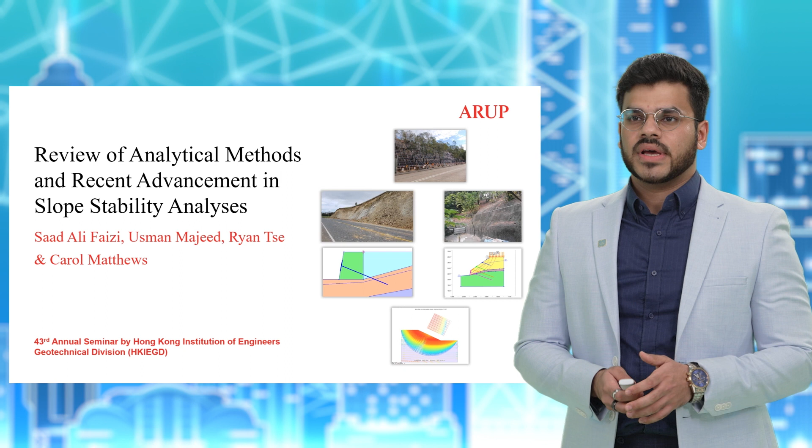I'm here today to present insights from our paper titled Review of Analytical Methods and Recent Advancement in Slope Stability Analyses. In this paper, we discuss some current analytical methods and propose a new approach to refine existing methods. We also share our recent advancements in automating slope design workflows. This paper is co-authored by Usman Majeed and Ryan Tse from Arup Hong Kong and Carol Matthews from Arup Newcastle, UK.

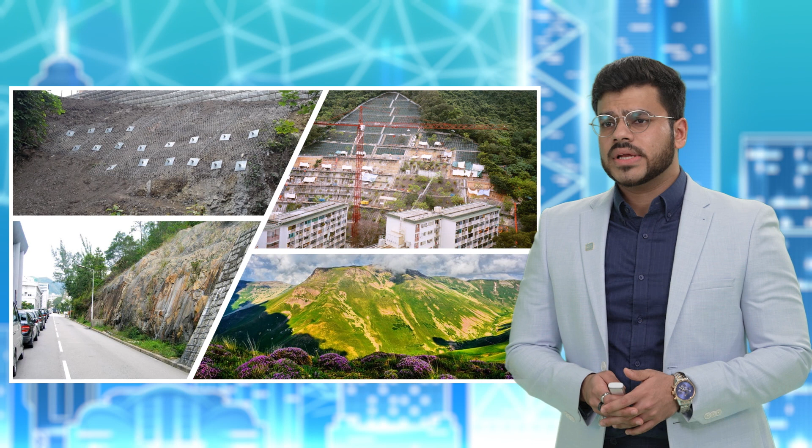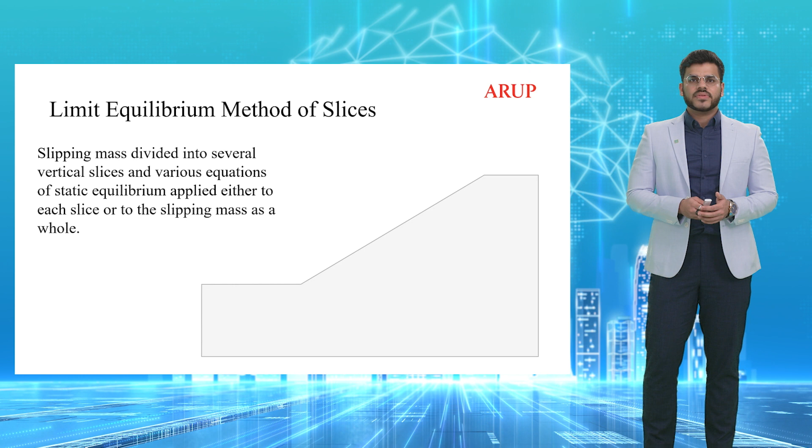Slope stability analysis is a critical aspect of geotechnical engineering and is important in various applications, including the design of retaining walls, excavations, and embankments, upgrading of natural slopes, among others. Current geotechnical practice widely adopts the method of slices, such as Bishop, Janbu, Spencer, and Morgenstern-Price, to analyze slope stability using limit equilibrium. These methods divide the slipping mass of the slope into several vertical slices, onto which equations of static equilibrium are subsequently applied.

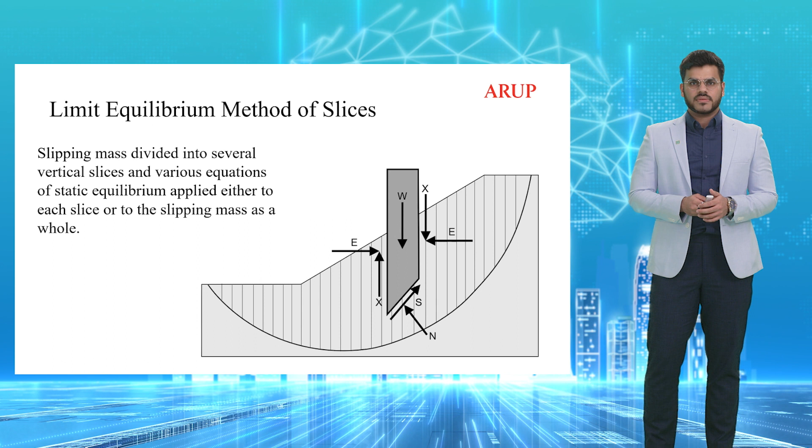The different methods differ fundamentally based on the conditions of equilibrium they satisfy and their assumptions regarding the interslice forces involved. Several studies and publications have investigated the merits and deficiencies of the different limit equilibrium methods. And while they all point out some fundamental limitations of the different methods, especially the simpler methods of Bishop and Janbu, these studies have also noted that the errors in the calculated factors of safety from these simpler methods are usually small and on the safe side.

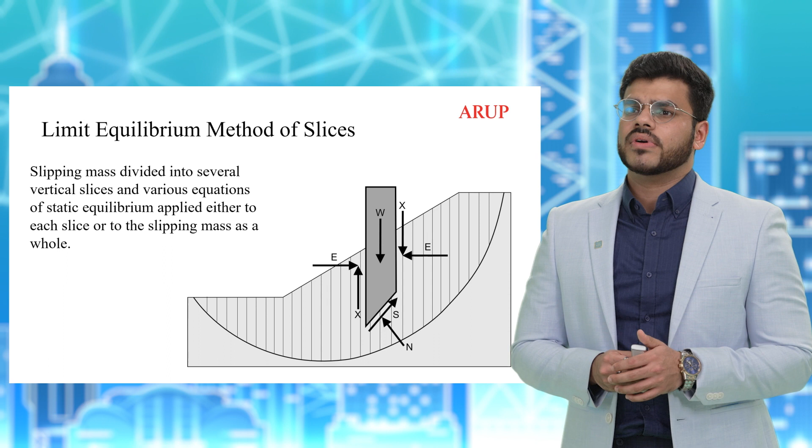However, there are situations in which these relatively simple analytical methods may encounter issues. Authors from past studies investigated the formulation of the Bishop method and its implication in various slope scenarios. They noted that the Bishop method may incur numerical difficulties and provide misleading answers in special instances involving interlock. Other methods like Janbu and even Spencer methods may incur similar difficulties in dealing with this interlock phenomenon. So what is this interlock phenomenon?

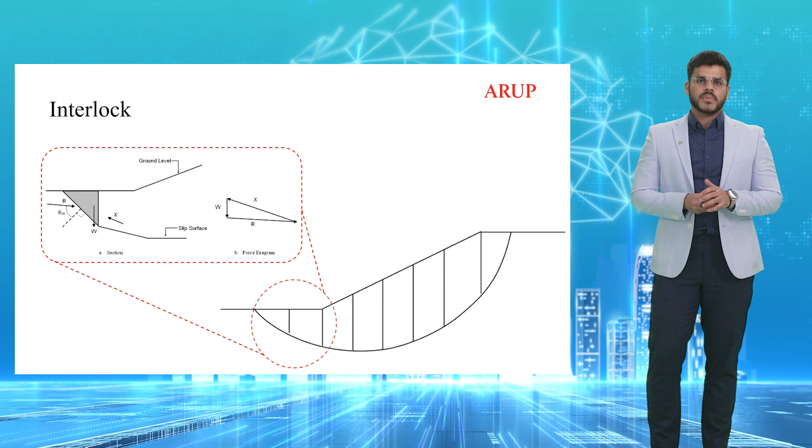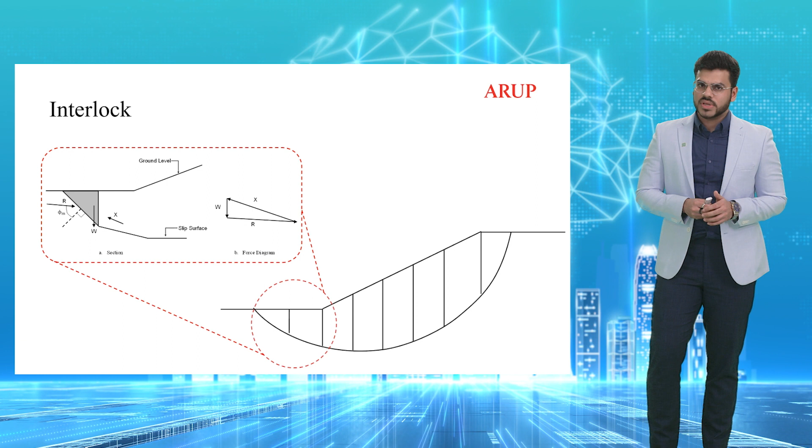Well, interlock arises in the case of a deep slip with a low factor of safety, where the toe of the slip surface passes steeply through a highly cohesive or a highly dense granular material. If a deep slip emerges at a steep angle and has a high cohesion or high mobilized angle of friction, then the direction of the resultant on the base of the slice may be almost horizontal or even pointing downwards, as shown here. To satisfy equilibrium of this slice, the interslice force must point upwards.

This direction is not consistent, however, with the assumption of either horizontal or even parallel inclined interslice forces. In such cases, the inclination of the interslice forces should be allowed to vary to act in the correct direction and take interlock into account.

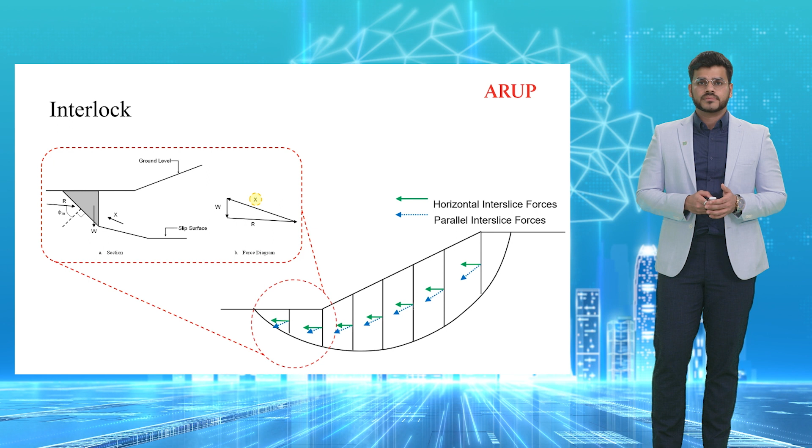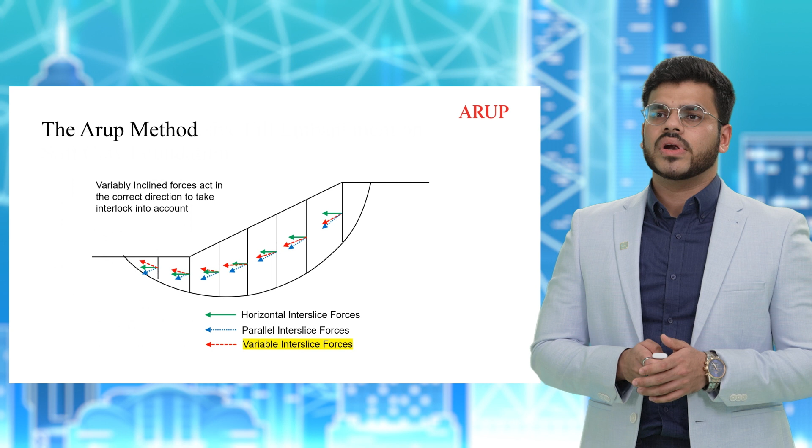Arup has developed a method whereby Bishop and Janbu methods are refined further by enabling the inclination of the interslice forces to vary. Under this approach, the program calculates the interslice forces to maintain horizontal and vertical equilibrium of each slice first. The inclination of the interslice forces is then varied in each iteration until overall horizontal, vertical, and moment equilibrium is also achieved. Two case examples from past studies are taken to investigate the interlock effect and the use of variably inclined interslice forces.

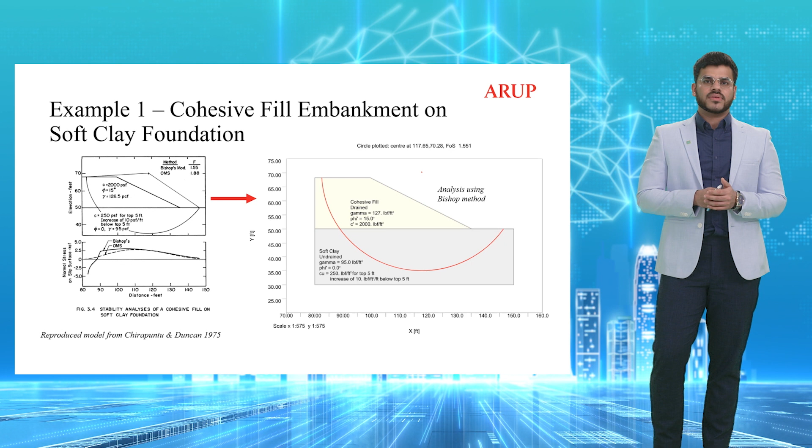In this first example from a past study, the authors exemplified the difficulty of employing the Bishop method by investigating the results of slope stability analysis for an embankment made of a highly cohesive soil. While a good agreement was noted between the ordinary and the Spencer method, the results from the Bishop method were noted to be unreasonably low. This was possibly due to the high cohesion involved.

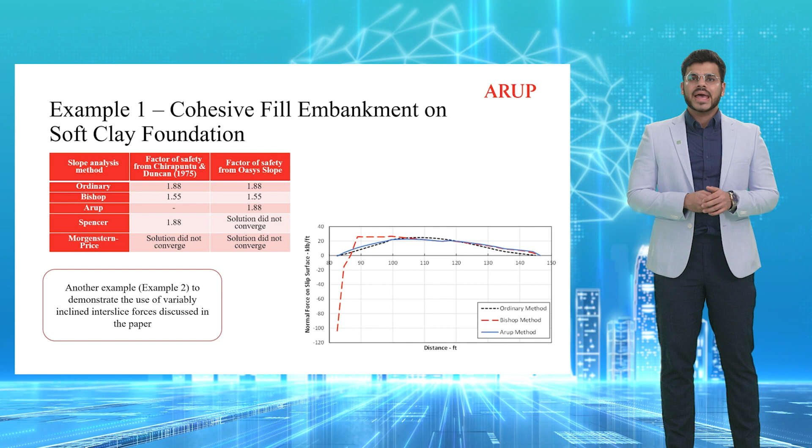This case example was replicated and rerun along with an additional analysis using the Arup method. Results obtained from the Arup method were noted to be reasonable and consistent with the ordinary and Spencer methods from the original study. A similar investigation is also performed on another case example presented in the paper in detail.

Hence, we can see how the Arup method offers refinement on existing methods and enables more reliable slope analysis. Similar benefits to slope designs can also be achieved if existing design procedures are streamlined. Fortunately, Oasys Slope does offer designers the opportunity to automate design workflows using customized coding.

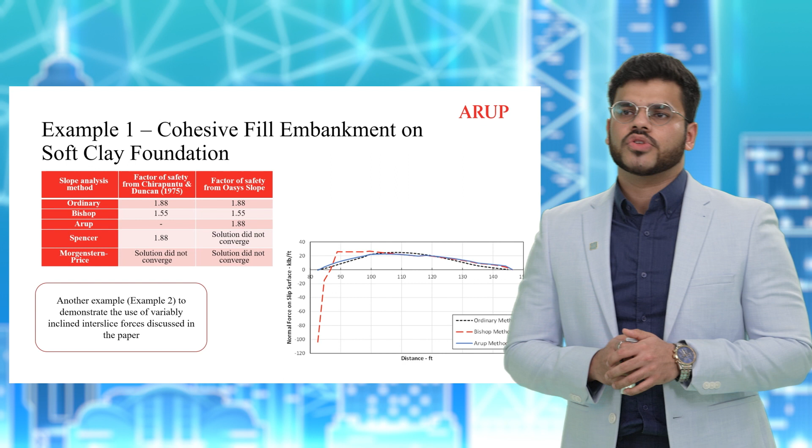Given that the design workflow of soil nail involves several design parameters and detailed calculation of bond strength based on specific slip surface, it requires several manual calculations, and any updates made to any of these key parameters or even a change in the critical slip position would require manual updating of these several calculations performed. Automating this crucial part of the design workflow can greatly assist an engineer and minimize chances of errors due to manual handling.

Oasys Slope facilitates automation of soil nail design through two distinct ways. Firstly, it provides the option to calculate the bond resistance of the applied reinforcement members based on the effective overburden stress of the slip surface.

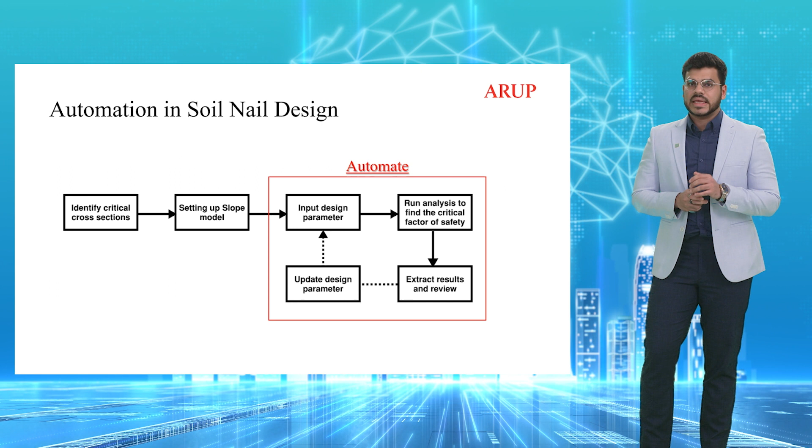Secondly, it includes an application programming interface, or API, that allows the user to interact with the analysis software using different programming languages like VBA or Python, instead of going through the graphical user interface. Once the API has been set up, users can pass relevant data to Oasys Slope and remotely run analysis through calling its built-in component object model, or COM functions.

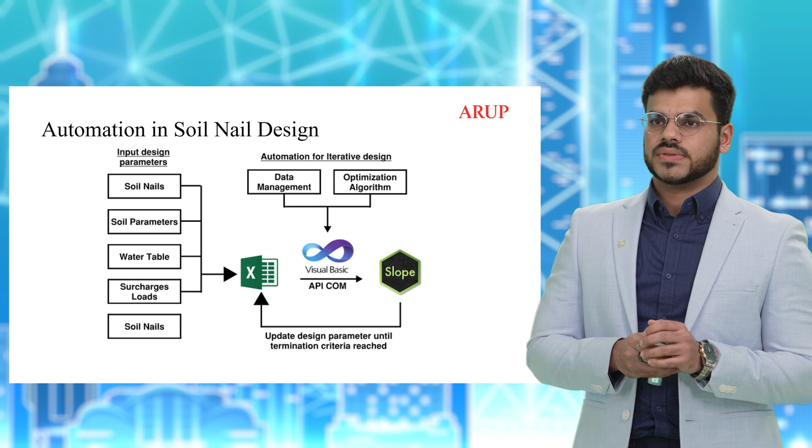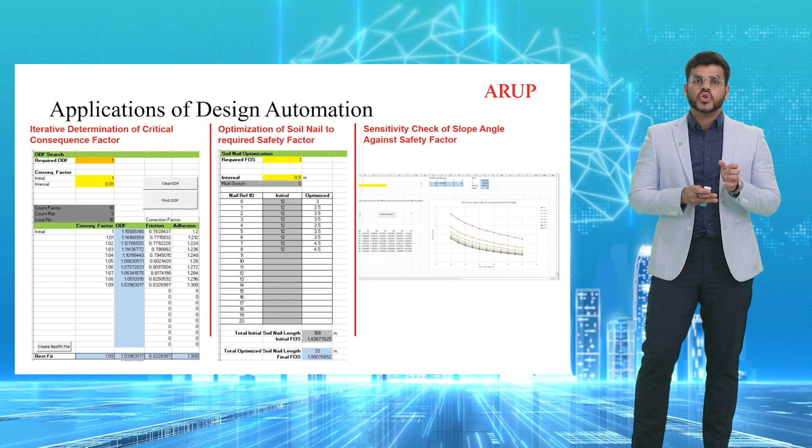Here we see a glimpse of various automation tasks, including iterations, optimization, and sensitivity checks that have been performed for the user with ease and efficiency. It is hence evident that by automating key tasks in a slope design, the workflow can be streamlined and made more efficient, allowing users to test a large number of design scenarios in less time. Increased model output allows a more comprehensive understanding of the slope's condition, while any change made to the design parameter can be quickly incorporated to swiftly update the upgrading design accordingly.

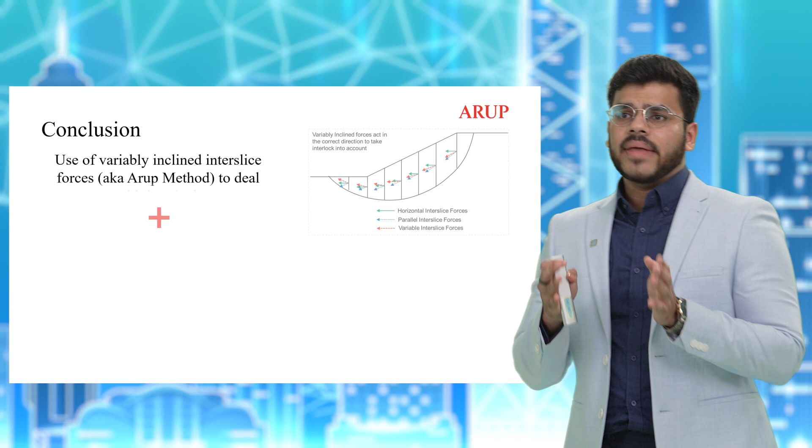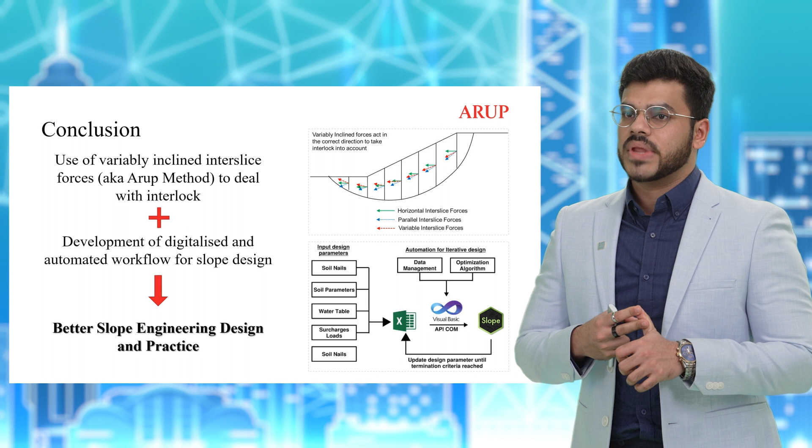To sum up, in this study, we have presented ways to improve slope stability analysis and streamline slope design by explaining the use of variably inclined interslice forces to take into account the interlock phenomena and provide sensible results, while also demonstrating our development of a digitalized and automated workflow for slope design that allows streamlining of the workflow along with optimization of design through rapid parametric study. These indeed are promising ways to pave the way for better slope engineering, design, and practices.